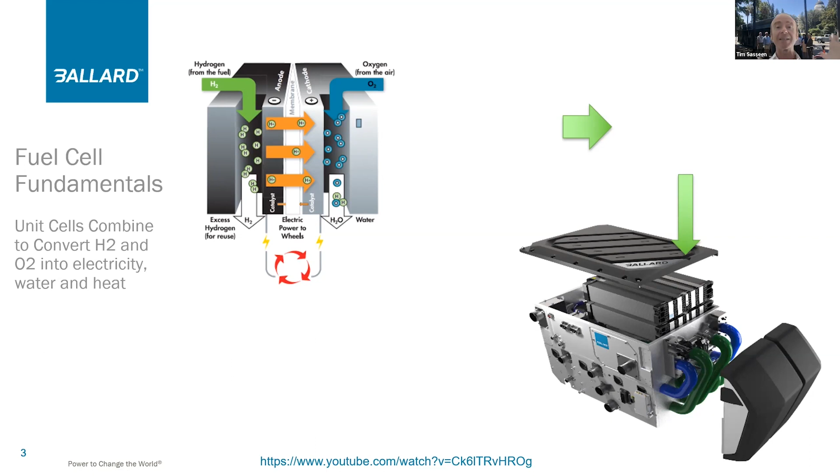And I'm going to give you an overview of hydrogen and fuel cells and what we're doing in the market today, all the activity with hydrogen. Basically, what we're doing in a fuel cell is instead of burning hydrogen, we're reacting it at a low temperature. Same end effect, but without the externalities.

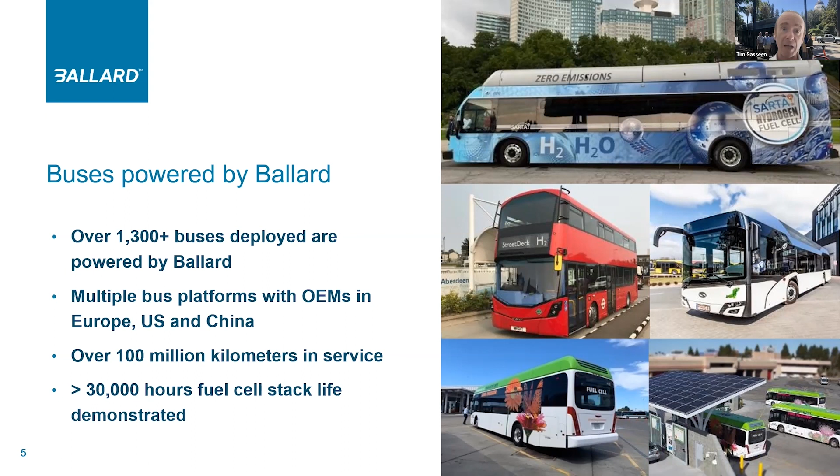This is an electric bus, but you take out most of the batteries and you put in a fuel cell and fuel storage. We've got over 1,300 buses on the road now, powered by Ballard, and lots of miles and kilometers behind us. Buses with demonstrated over 30,000 hours of fuel cell stack life. And not just ours, some of the older buses that AC Transit has been running have gotten over 30,000 hours as well. It really shows that the technology is capable of lifetimes that are enjoyed by present combustion engines.

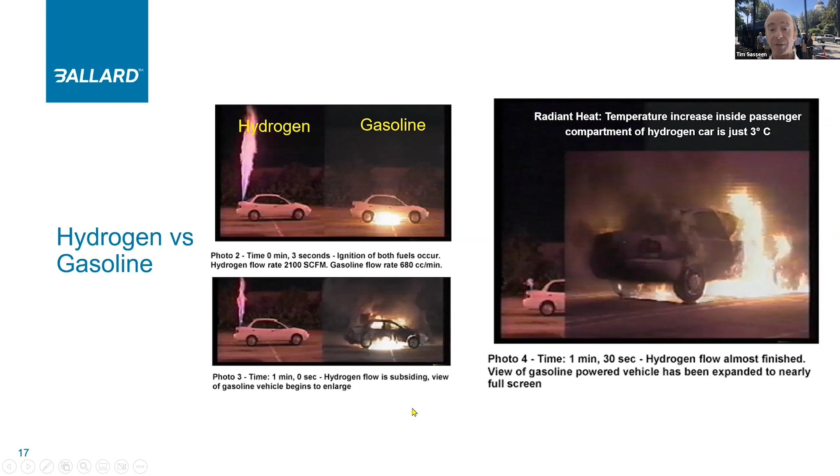And when you compare hydrogen to gasoline, you see some real advantages. Not only is hydrogen non-toxic, but it also is very buoyant and very diffuse. When it gets out, it can be contained in how it's released, as shown in the study done by Ford, comparing two cars that are intentionally given a fuel leak and an ignition source. The gasoline you see pooling on the floor, creating vapors, engulfing the vehicle in flames, whereas the hydrogen can be contained to a single release point and safely evacuated. Comparing it to gasoline and diesel, there's so many personal safety advantages, particularly regarding toxicity and ingestion.

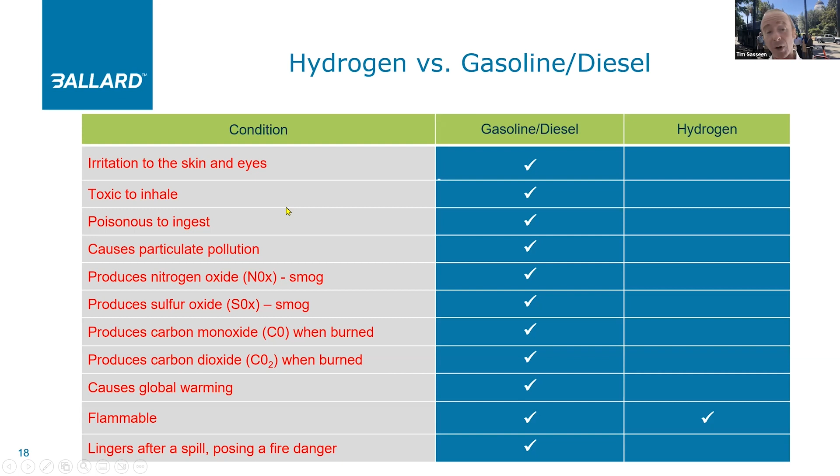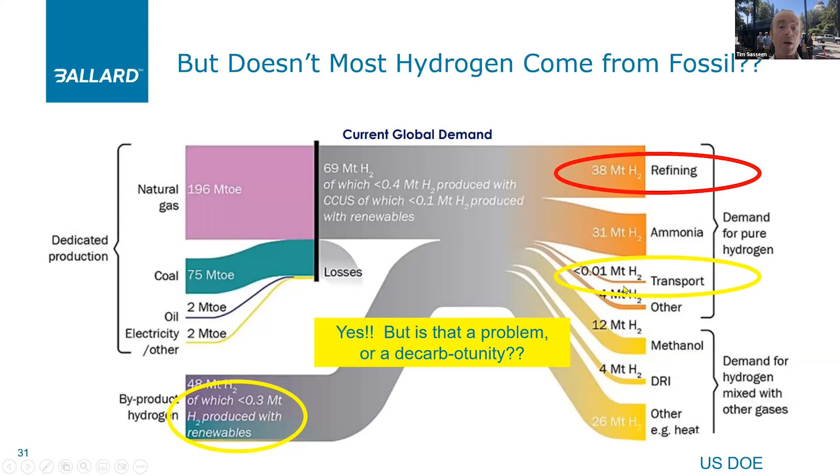One thing that you should bear in mind that critics of hydrogen say is that most hydrogen is produced from natural gas and fossil sources. That's true, but most of it is not used for transportation. Only a very small amount is used for transportation. More than that is made by zero emission hydrogen. Most of it's used for refining.

So Linde is a global industrial gas company. We've been supplying hydrogen for well over 75, 80 years globally. One of the key factors is it's important to be able to condition your hydrogen. And we do that in a number of different ways, and one of the most prominent ways is with liquid hydrogen. We actually take a hydrogen molecule and we cool it down to a very low temperature, about 20 degrees Kelvin, and we liquefy that product so that we can transport it.

Now, the benefit of that is that we can transport a higher supply of hydrogen molecules, typically about 10 times versus conventional gas hydrogen trailers, and we can use it very efficiently at fueling locations, especially for the mobility market.

President Biden has recently passed the Inflation Reduction Act, and that is going to be another funding source that helps reduce the cost of hydrogen and infrastructure that's being deployed across the United States. So the combination of the infrastructure bill and the Inflation Reduction Act, which is commonly referred to as a production tax credit, are two ways that are really going to help meet the goals that the DOE has set out in terms of the $2 per kilogram.

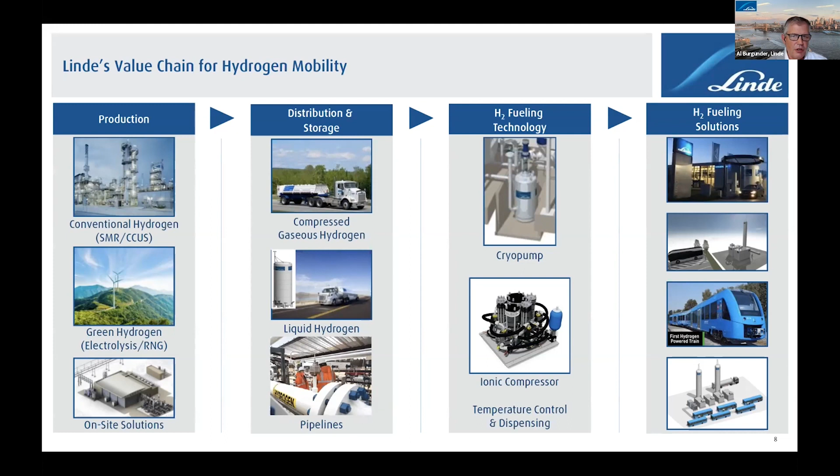We have the first commuter rail operating on hydrogen in northern Germany. We're heavily involved with the OEMs as far as trucking is concerned. Also getting involved in marine activities and rail. So all those markets are opening up in terms of the use of hydrogen.

Good morning, everyone. My name is Matt Grigori. I'm a technology development manager with SoCalGas's Research, Development and Demonstration team, or RD&D. Our mission is to build the cleanest, safest, and most innovative energy company in America. And we've committed to achieving net zero greenhouse gas emissions in our operations and delivery of energy by 2045. That's our Aspire 2045.

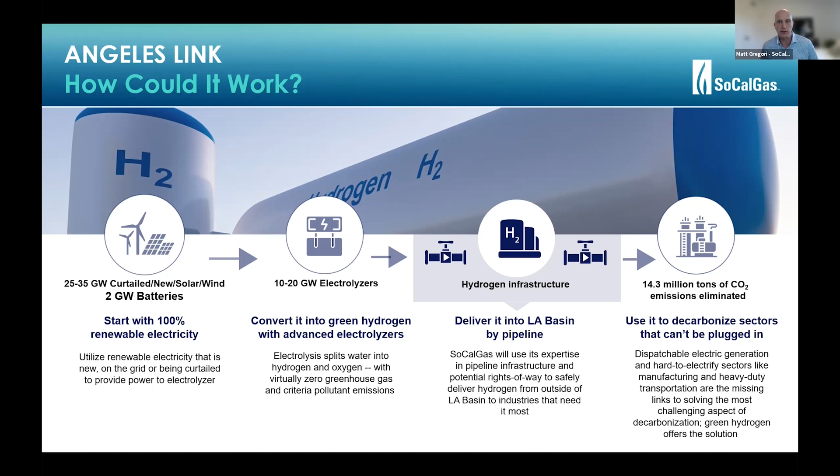We recently proposed to develop what would be the nation's largest green hydrogen energy infrastructure system to deliver clean, reliable energy to the LA region. The RD&D program funds researchers to develop new technologies that we think will benefit our customers and all Californians through energy savings, reduced environmental impacts, and improved safety and energy reliability.

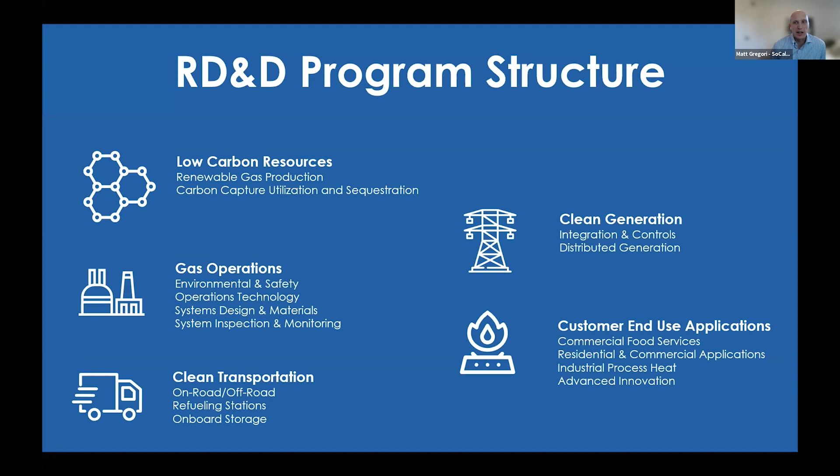Our program is divided into 5 research programs that span the entire energy delivery value chain. About the Clean Transportation RD&D program. This program focuses on minimizing the environmental impacts related to the transportation sector, particularly through the integration of hydrogen and renewable natural gas. We recently announced that we're working with Ford Motor Company on a demonstration project to reduce commercial fleet emissions by developing an F550 Super Duty hydrogen fuel cell electric truck.

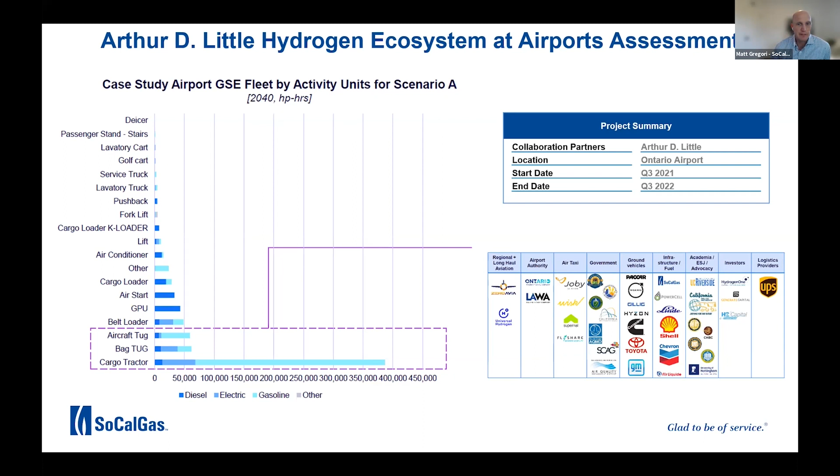The study provided a high-level assessment of the components required to convert Ontario International Airport into a hydrogen ecosystem to support zero-emission regional and short-range aviation and transportation. Preliminary results suggested that converting just 3 types of ground service equipment, these are the vehicles that run around on the tarmac servicing the aircraft, so just converting 3 types of ground service equipment to zero emissions would reduce CO2 emissions by 52% and NOx emissions by 89%.

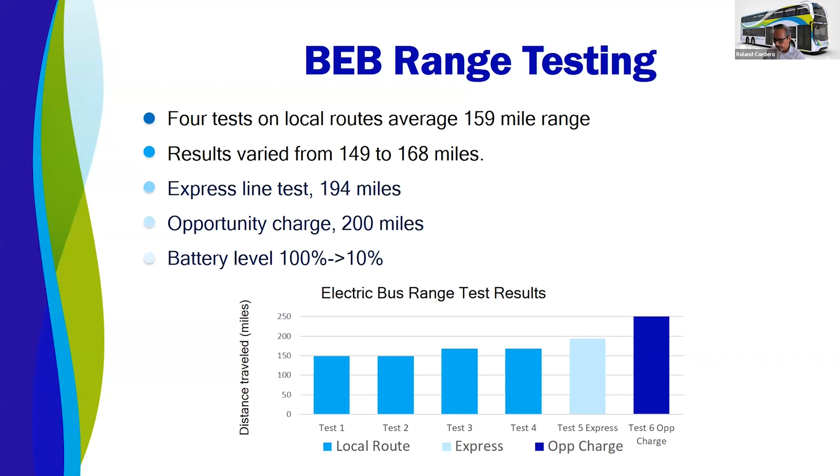In 2017, we received our first fleet of Proterra extended range buses, which supposedly had a nominal range of 251 miles on a single charge. Our actual findings operating the buses in actual service showed only an average of about 159 miles. In order to operate these buses on line 280, which we had planned to electrify, we needed a way to extend their range. In 2018, we hired Burns & McDonnell to prepare a study for a plan to transition to 100% battery electric bus by 2030.

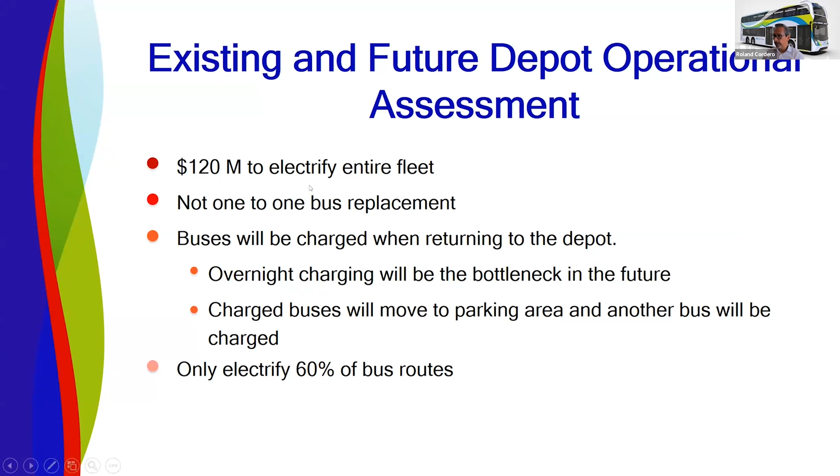The report was issued in 2019 and indicated that it will cost Foothill Transit about $120 million to transition to a 100% battery electric fleet. The battery electric buses are a 1.5 to 1 replacement and require us to increase our fleet size to operate our current service. The cost to build fueling infrastructure for over 100 buses is about $6.6 million. And scaling the fleet size will only require minimal cost by adding another hydrogen tank. The fueling process takes about 10 minutes to fill each bus versus hours to charge an electric bus.

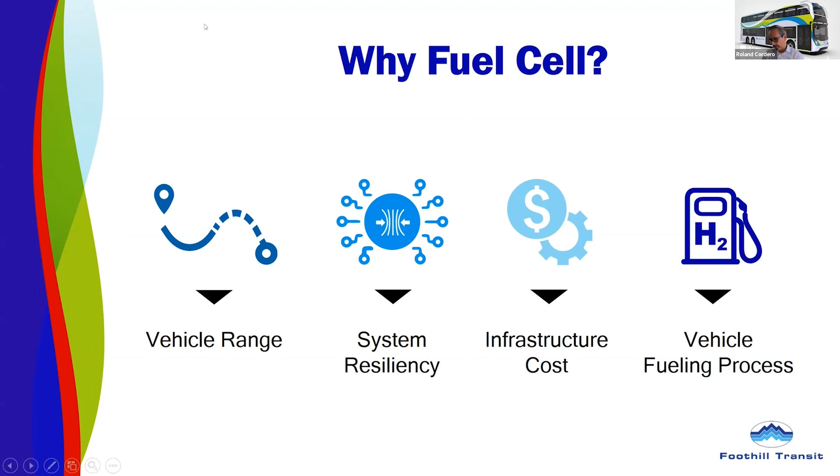California offers several incentive programs to assist in lowering the operating and capital costs of both battery electric buses and hydrogen buses. Low carbon fuel standards, or LCFS, allow agencies to earn credits from operating zero emissions fleets. Other programs include HVIP, the hybrid and zero emissions truck and bus voucher incentive project. There's also VW mitigation, which offers up to about $400,000 for a fuel cell electric bus purchase.

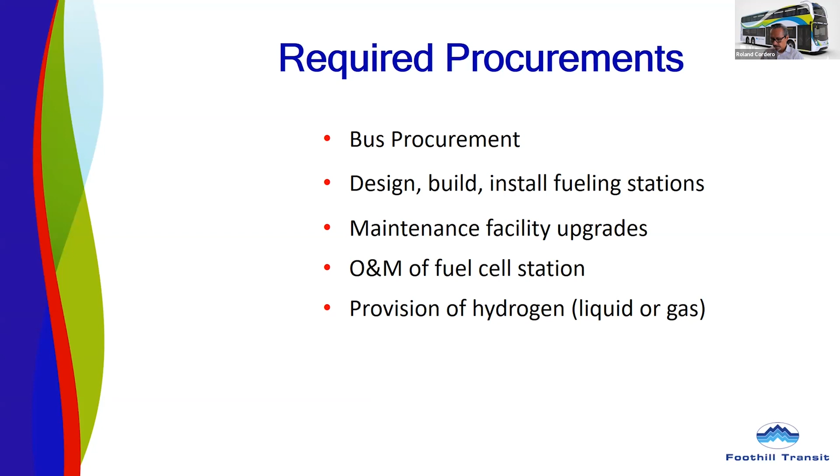In order for us to move forward with our hydrogen fuel cell program, we had several procurements that were required. We had to issue the following procurements to move forward. We purchased our fuel cell buses through the California State Zero Emissions Vehicle Program. We issued procurement for the design, build, and installation of fuel cell fueling stations. In order for us to move forward with maintaining and repairing our fuel cell buses in our maintenance building, we're required to install hydrogen detection systems and upgrade the ventilation. We also entered into a contract for the operations and maintenance of the fuel cell station and provision of liquid hydrogen.